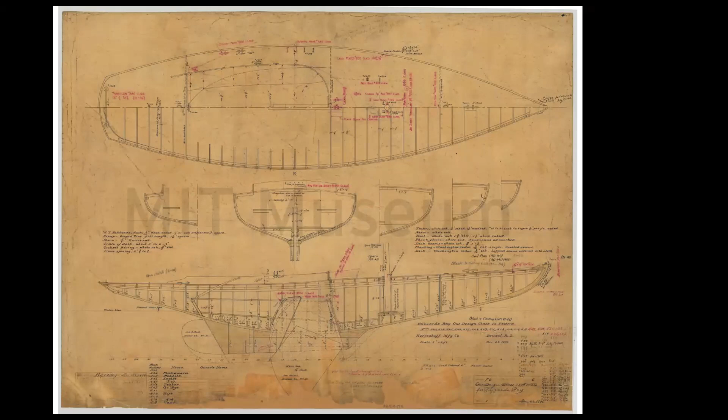So I kind of knew where to get the information - talk to MIT. The drawings are as beautiful as the boats quite often. So I persuaded Chappie that we've got the info. There's the original sail plan. Of course, I've shown you the Marconi, but we were stuck with that one, which I think is far cooler.

This is the Book of Offset. It's not for that particular design - this is another one. It would say 503, I think, on the offsets for the 15s. But talk to MIT - you might get the idea in this little talk that all roads lead to MIT. No, some roads lead elsewhere, and I'll talk about that.

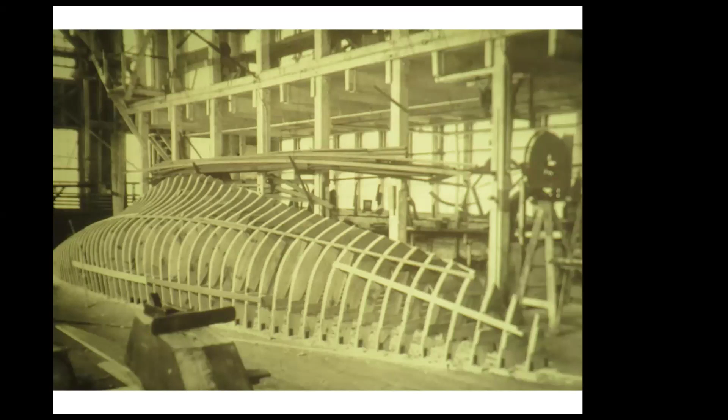So in the end, we pretty much use all these techniques, a mold for every frame, and build all this tooling to build one boat. We were smarter than that, and then off we go.

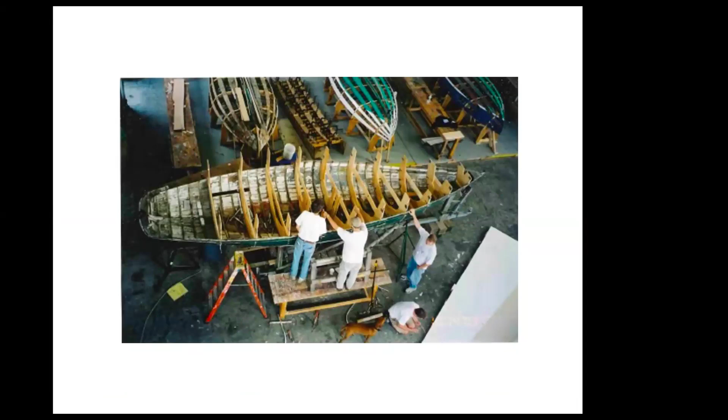We did sort of compromise on this boat. We did the mold for every frame, bent the frames around the molds, and squished the molds into the boat. And now you'll probably say, well, why would you ever want to do that?

Well, the idea is it's every other frame - you'll probably notice that. The idea is that you squash them and the boat's supposed to now resume its original shape. And of course, if you look at the tops of all those molds, they sort of don't seem very organized. So we set it on a platform, and once again, it's quite emphatic about the fact that that thing is totally screwed up. And that really all should be touching.

So that's why those guys are milling around in the back wondering what we're supposed to do now. Well, you push and shove some more. Basically, we stripped all the structure out of the thing, kept some planking in place - I think you're keeping the soul of the boat in there with those few planks. Somehow we've captured the idea of the boat, and on we go.

This is all old school stuff. We spile, take the bevels, back out the planking - all old school. It's as traditional as you can get. And blammo, see how fast we can plank?

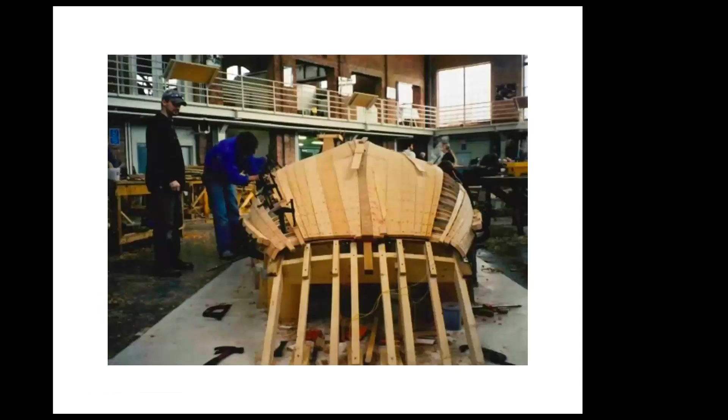These are IYRS students, and we have 3 boats, so I'm going to be moving. I hope you don't mind.

But anyway, there's Mark. He actually put in the shutter right before Christmas. He was in such a hurry that he drove the edges off the adjoining planks, and we had to redo the whole damn thing. But it was exciting anyway, and it was the quickest build we had at that point.

So there it is, all planked up, and now we've got that shape starting to emerge. I am a total sucker for boats in this stage - they're just a piece of sculpture. The coolest thing - they don't have to do a thing, just be beautiful.

Little interior structures starting to come together. This is sort of the idea behind this talk. So this is Fiddler at Mystic Seaport - it gives us an excuse. You can go to the museums, check it out, take pictures, record, and the students trundle along.

And I mean, it's great - it's such an excuse to do cool things. So there's Dave, Walter - they think this is cool. And actually, Dave is absolutely relieved that the coamings didn't break.

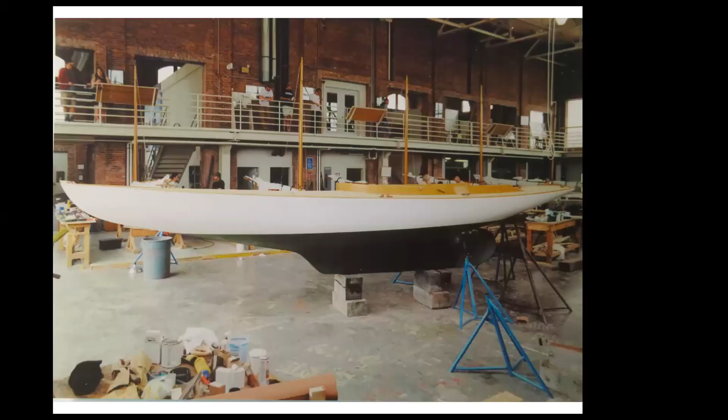So we have to fit those baubles, they call bow chocks. It's starting to look a lot better than that first picture. Matter of fact, it looks twice as long as it is. And the moment of truth.

So they're very cool boats. My father sailed them, he raced them in Marion Harbor, and he said it was the wettest boat ever. I don't know why people are so excited about them, but he did admit they went like crazy.

So there he is. Here's this young guy. After all, it didn't seem so bad. And what's coming is a sail, and that's the deal.

We have to have a carrot at the end, and that's launch day. Get it done, you go for a sail. You'll see there are exceptions, but still, that's the idea. You got 300 people looking at you if you don't get it done. How about if we get it done and go for a sail? And they seem to move when you offer them that.

So there they are, first sail. This was a good project. And there he is, see? Smiling. There's the future right there. The idea that he's 20 years older, I was old then, but he's 20 years older, it sort of blows my mind. He's like an adult or something.

Anyway, and the instructors get to go for a sail too. That's the big payoff for us. We get to sail this thing around. We don't know for a couple of days, and sometimes we teach sailing in it, and that's I think the Wheeler Estate in Jamestown, Rhode Island.

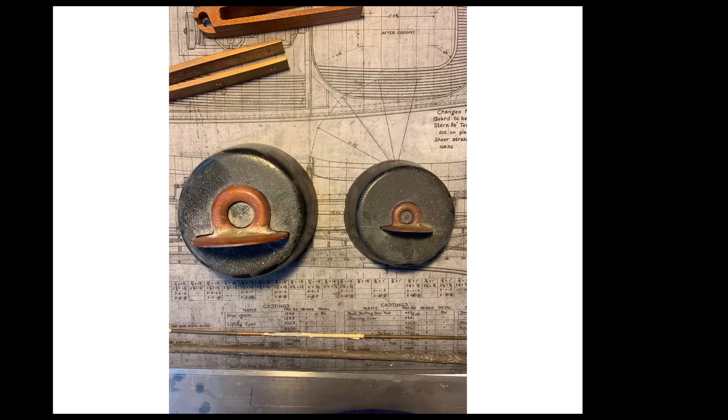And we do go from museum to museum. Then they've got all the stuff. You, the world, have this.

There's a guy named Claas van der Linde. He's Swiss, precise, super nice, crazy knowledgeable. He built a website for you to pursue everything Herreshoff right in the comfort of your own home. That's the title of it. You can find it at herreshoff.info. Try that first. Watch out for my facts.

Anyway, Claas built this thing. He went to the Herreshoff Museum, took each model down, read what Nat or whomever wrote on the back of it, and documented it all. Then he built this website where you punch in a number, like 503, and all of a sudden you have everything to do with a particular design.

And here you are, you guys are here. I'm talking about computer stuff. It's not really me, but man, is this stuff useful.

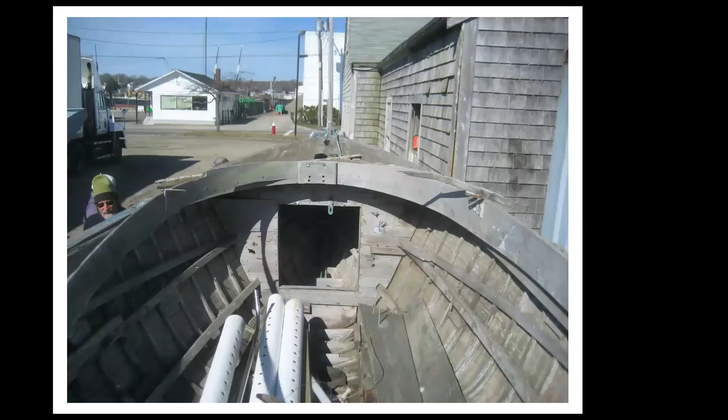And it had a lot of detail in that light framework of the Herreshoff boats, the coamings. And I admit, I was kind of trying to push my own deal and get to do it. But there were a lot of elements that just kept reminding me of the Herreshoff launches.

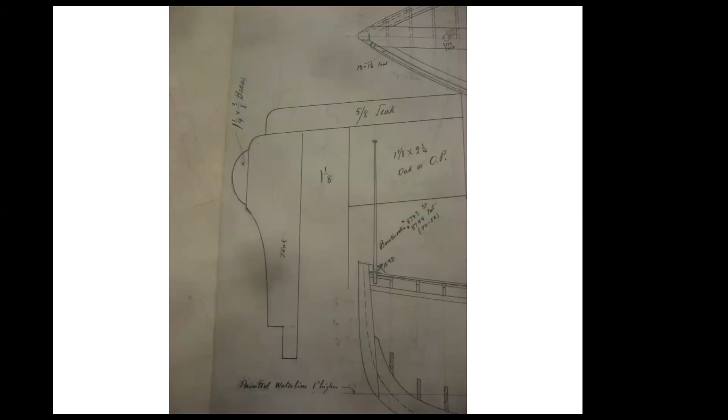And then there's this beautiful, see, it's double planked. It was a beautiful build. And then the molded sheer strake, which I think I might have, yeah, see the swell at the top. Well, this is a Herreshoff drawing of that very detail. How could you go wrong? It has to be a Herreshoff. And so I fell for it.

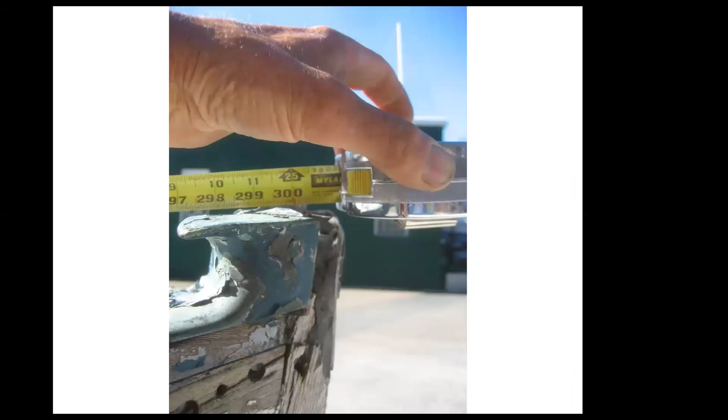So guess what, we decided we'd do this thing. Those straps, as soon as you remove them, pieces fell off just trying to get it to that. So I had some empirical data, and I went to see Kurt, and we pulled out a billion drawings of Herreshoff launches. And he started to shake his head very early.

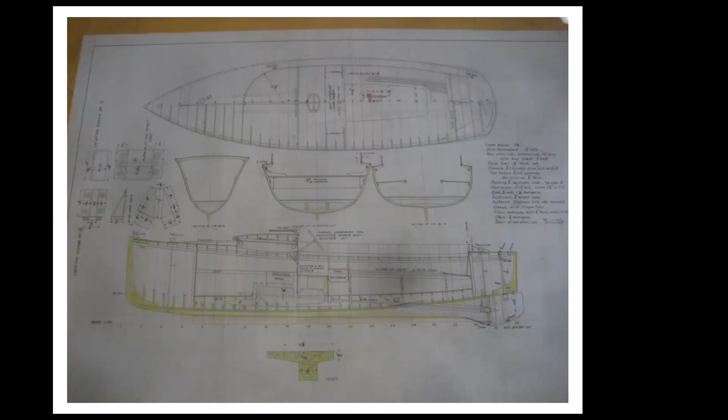And I'd have to say I'm sort of smitten with the drawing, so I get going, and I thought, oh Kurt, this is cool. I wonder, some way we're going to find that launch, because I know it's in here. And I said, maybe it's that one, look, it's got the double cockpits, it's got to be something along that line. And maybe it's a secret one.

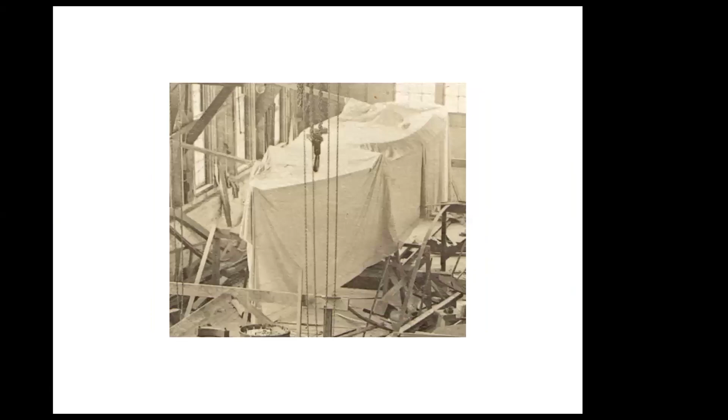He was sure, Kurt, by this point, said, listen, there's no silver bullet, you're not going to find that. And I said, what about all those little notes they write all over those drawings? I'm sure somebody put one that said it's just about as long as a 25-foot tape. I'm sure it'll be right there in red or black or blue. Maybe it's Bubble, the family launch.

And this is the one I actually really wanted to build, so I tried to persuade everybody. Well, Vicky and Benson put Bubbles' sheer and half breadth on the floor, looked at me and said, this is not your boat, you're done here.

Yeah, I'm sorry. So, which brings up another point. If you want the key to, not the city, but key to Claas's thing or anything to do with Herreshoff, try to find a boat with one of these plates on it. It immediately tells you its whole pedigree, who owned it, why it's important, what year, everything about it, absolutely everything. You have that number and go to the Claas's site.

They're so important that I feel this is what you should do to them: just bolt them right through the stern of the boat. Nobody will mind, I'm sure. I said this once at the Herreshoff Museum, and in the back there were people fainting, they're so sensitive.

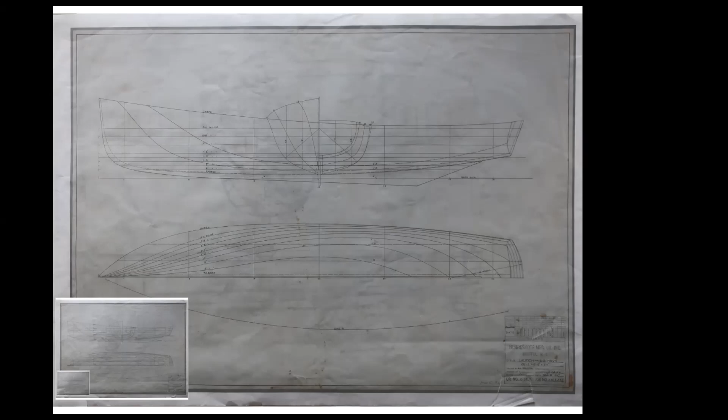And they drew one, well actually I think Evelyn said more than once, they drew the set of lines for the 330 launches. And guess what, we decided that's pretty cool. That's Resolute, a 330 launch, at Mystic Seaport.

How about if we take that hull, scale those lines, build that hull, and put the stuff from the old boat in it? Nobody says no, because nobody dares.

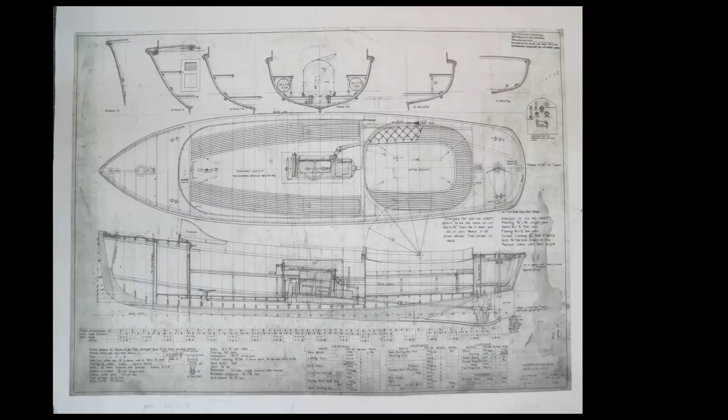Anyway, we thought, okay, here's the construction drawing, but why not document everything in the original and stick it in that hull? I'm not a naval architect, I needed a proven hull.

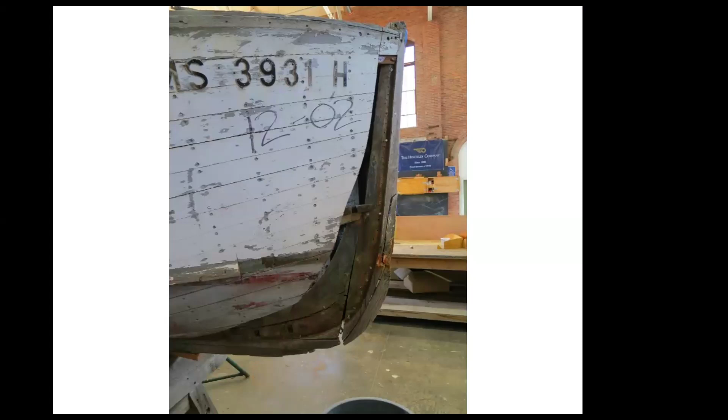We kind of liked the Herreshoff thing, so we did steal a bunch of elements from it. It had a sharper forefoot and an almost plumb stem. We snuck that guy right in on our lofting.

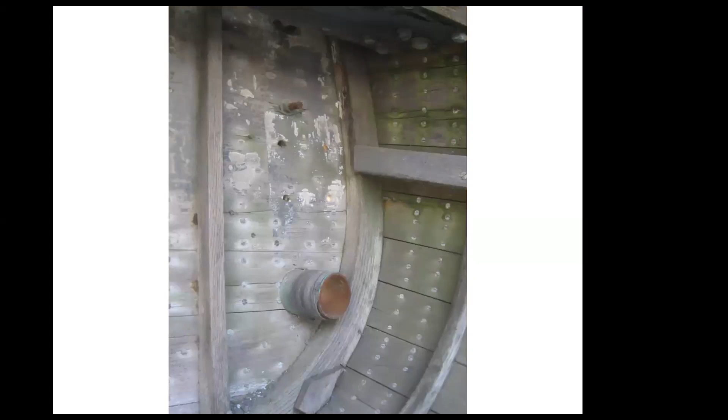Max is very excited about it. And the stern was built with steam-bent frames around it, which is a little bit different than Herreshoff, but we faired it right in.

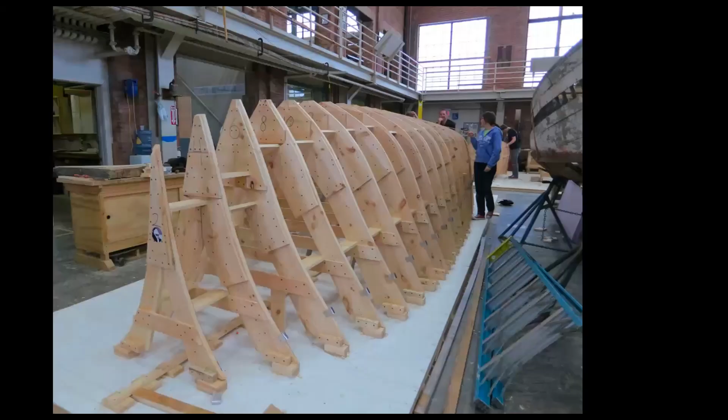And so we lofted a 330 and set up all the molds just like we were supposed to, but we slid in elements from the original boat. Those full-length longitudinals, you don't find those in Herreshoffs. But we thought, we got this boat, we'll make it a hybrid.

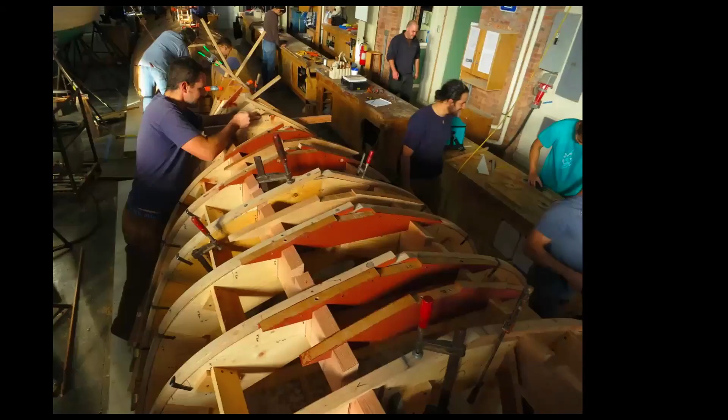Anyway, I had a really good gang. Steve Lublitz, he runs Wooden Boat Works on Long Island now. This gang, they were motivated. And Sam, where is Sam now? He's 6'5", that's short Sam. There was tall Sam, he was 6'6". We worked together, anyway, he's a really cool guy.

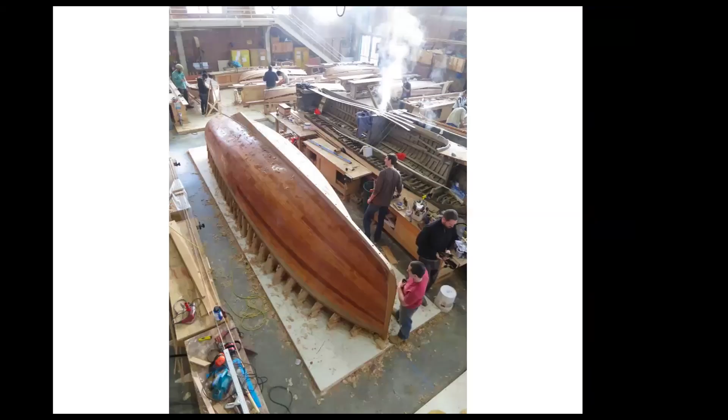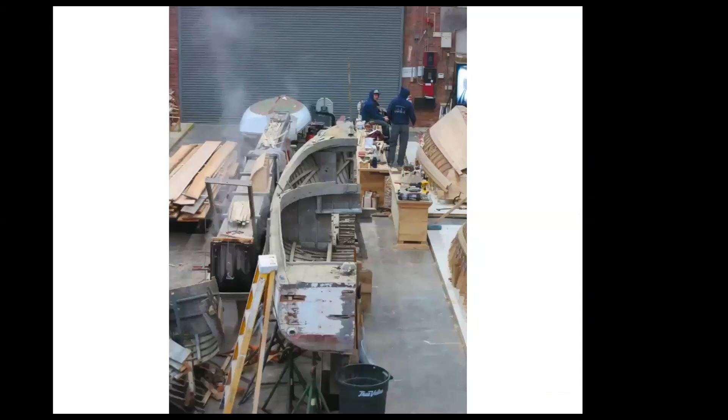So, double planking, the off shear strake, it's a quick build. These guys are fast, look at them go. Anyway, over she goes. Like in the small boat shop at IYRS, we do everything like they did it because we think it's cool. And now that is a teaching instrument.

I never got to cut a boat in half, full length, ever before. It is the coolest thing.

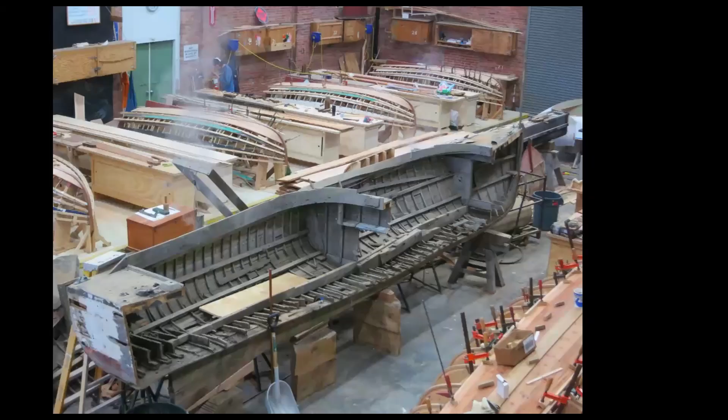So all that info is about to go into this boat. And I don't know, I really wanted to keep it, I wanted to stick it to the wall of the shop. They never listened to me, but that was a gas.

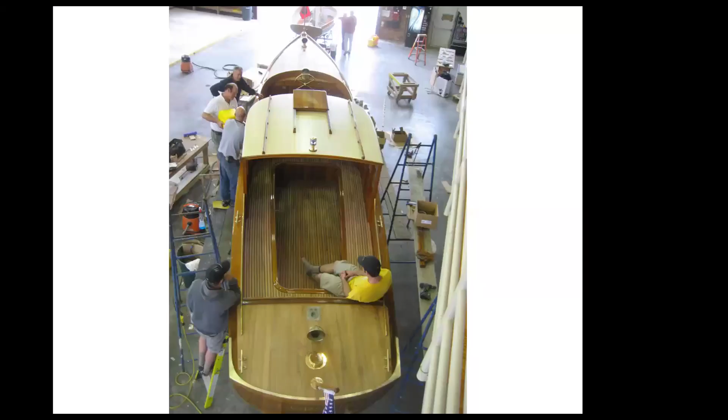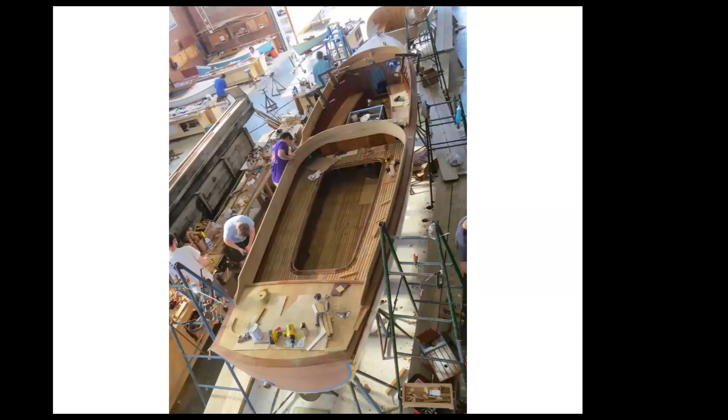So we did it. We stole some more detailing from Corsair notes, and here we are putting it together a la IYRS, and it was a fabulous build.

It's all the frame spacing, all this stuff that was longitudinal, all the stuff came out of the old one. But we really just went with a proven hull.

However, it was nice looking enough for some guy, Doug Broadwater, to buy it and take it to his Adirondack Lodge. And it sort of just tools around the lakes up there. I have to say that's better than a dumpster.

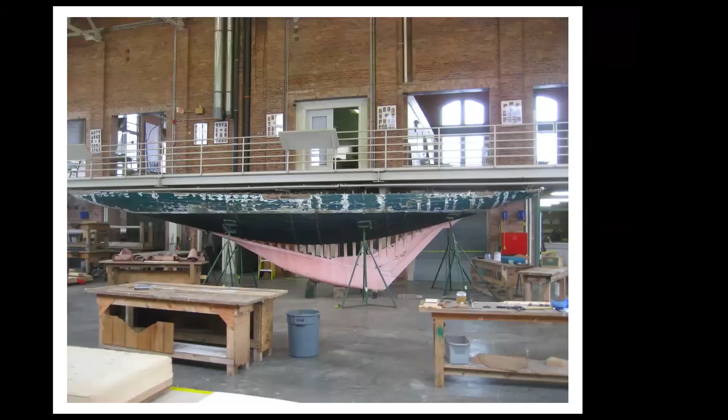Finally, we're getting there - don't fall asleep yet. So as I said, the parking lot's filled with all these boats, and some of them just speak for themselves.

This is Ruida - Ruida 5, that's all I knew about it, that was in the little blurb from when it was donated. And Elizabeth Meyer - all the boats at one point were painted with house paint. She just thought they should look a little bit better. And it was just striking in itself.

They started to have interest in restoring it in about 2006, I think, but it was slightly delayed, to say the least. But that shape, I got all excited about it, and I thought I was excited and terrified, to tell you the truth. This thing was big from my point of view, not around this place, but from my point of view.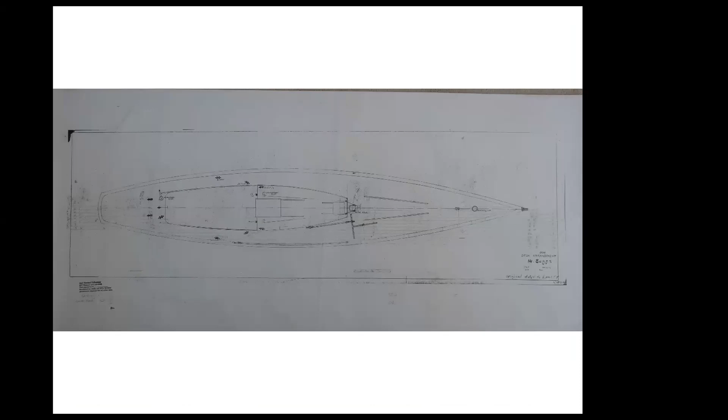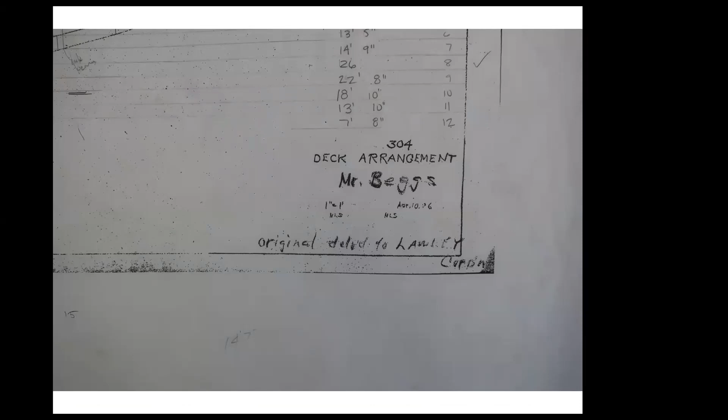Oh, he had a blueprint. So now I'm thinking I've got it, no sweat - there's the blueprint. It did really come out badly, but the key part of the blueprint is this: the boat was commissioned by Mr. Beggs, so we've got the owner's name, and it was built by Lawley, the builder. So that's a lot, but we still don't know enough to build a boat.

However, and I have to admit, I don't know how this happened.

There was a... well, you're going to find out, but I don't know how I ended up in the IYRS library. I might have been asleep in the stacks or something, but it turns out these are scrapbooks, and they're all yachting clippings collected by a guy named Leonard Fowle. He made scrapbooks like crazy.

This is about a week ago. Our new librarian, Francis Frost, who is a wizard, said, well, you've already got your little sticky notes in there, why don't we find out about these guys? So I actually asked them to, and so there they are.

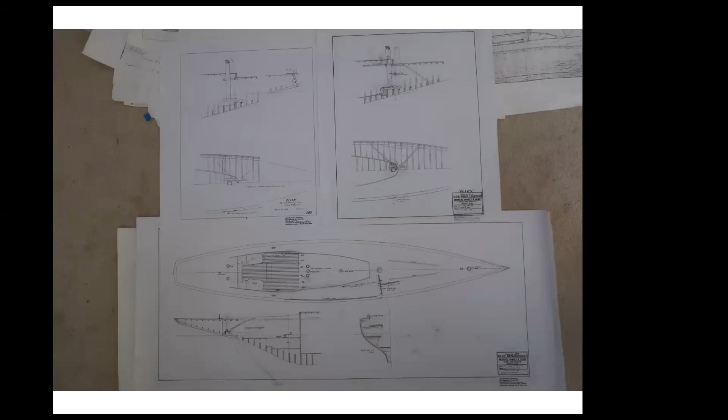And when you get to that point, all of a sudden mentioning Ellen, and you have a million drawings of an R boat that's just like the one you've got - blammo, now you can do the job. And so it had everything.

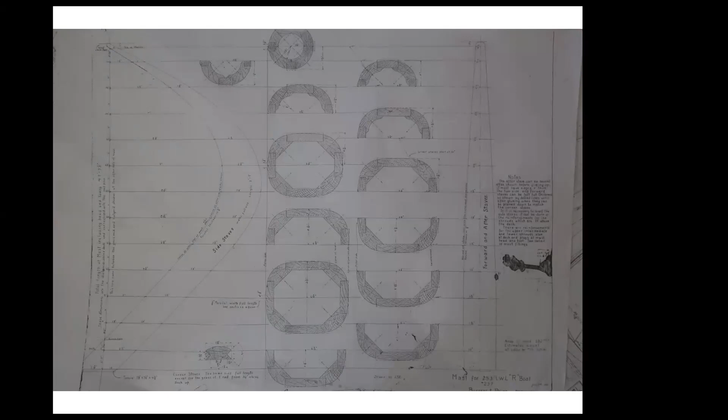And see how it says Dandelion? Well, they're all the same. There's Ellen's little alteration. Ours look like that. We'll go with that. We're going to take the information and fly. 'Mast, you sure it was for Dandelion?' 'Sure, it's the same as our boat.' We decided - actually, I measured a whole bunch of stuff. It had to be. But we had now the key to that city, and off we went.

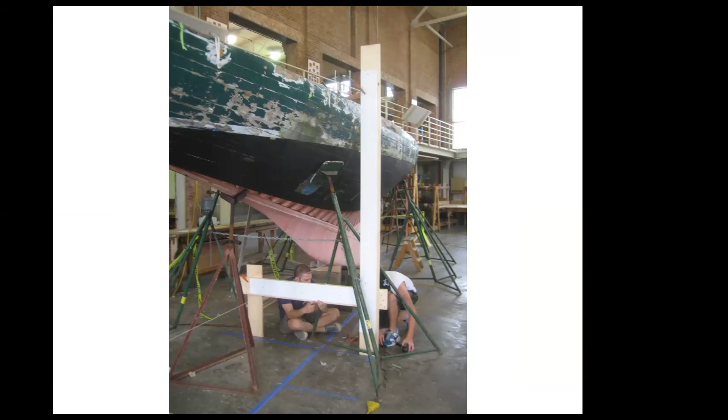So the boats - you're going to notice the boat doesn't move much, hardly at all. And they decided we'd take the lines off. We didn't have the offsets.

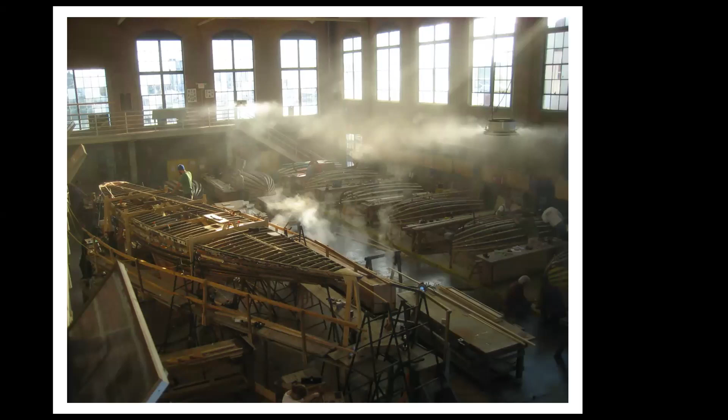And there's Andy Chapman saying, 'Warren, you have about 50 slides to go through, keep moving.' But we are reading the boat so that we could draw it on the floor, come up with mold stations, and start tweaking, pushing, shoving this hull. We didn't make molds, we actually pushed and shoved.

And see, we poked the bow up, the stern's all pulled up. We've got what we think is a nice sheer line, all that stuff. We just racked the boat and pushed it from the inside. And we had readings from our lofting, but we didn't put molds in. 'Is that all right, Harold?' 'Okay, good.' And anyway, there it is.

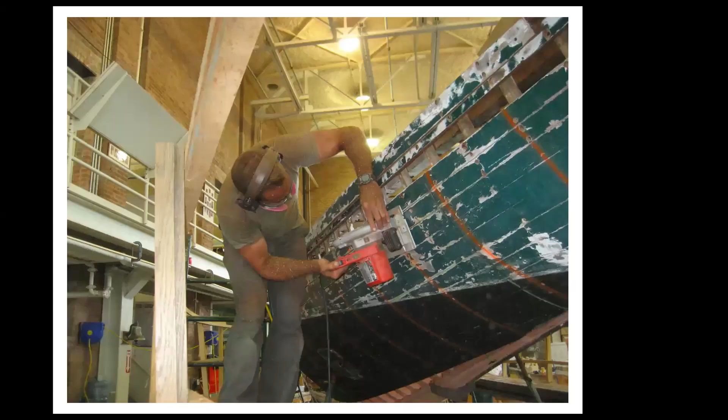Sort of - it's on poppets. It's been tweaked somewhat. And then we very carefully and gently took it apart. And these all have electric cords, Harold, so these are all right.

And now came... that's Dave. I work with Dave now.

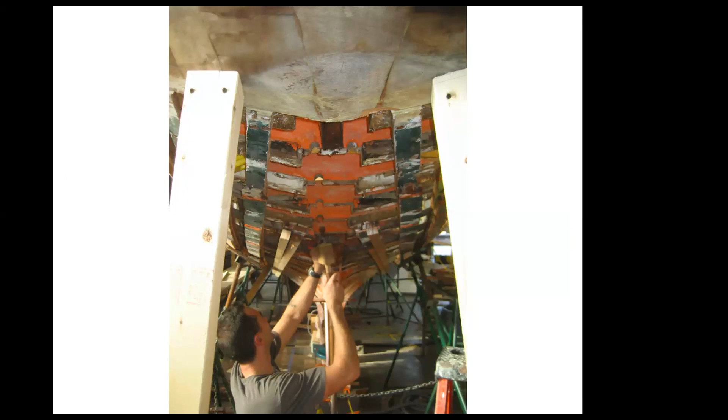This crew competed to see how dirty they could get, not changing their clothes, and how many hours they could put in. They were wired, and knew from the get-go this was a big project.

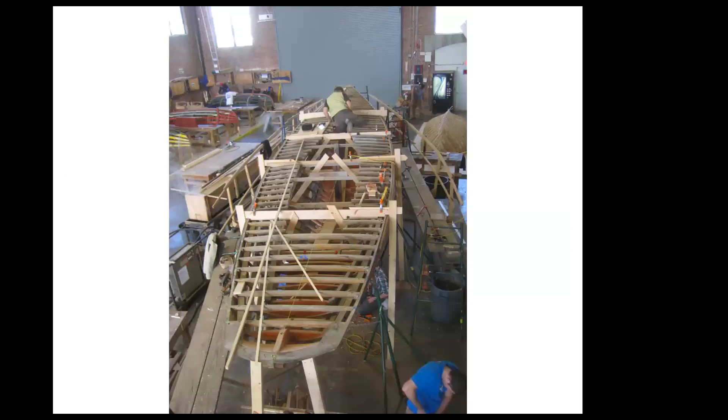We're going for it, so more pushing and shoving. We believe what we did is we took the planking - it's a double planked hull. We took the plank off and fastened it to the preceding plank so it made a ribband, so we could steam new ribs inside the boat. It's become quite flexible.

Now it's set up, and we started to replace some of the smaller pieces. They're very proud of their work - that's Bryce on the right, and Andy. Kiss me, I'm a leprechaun or something.

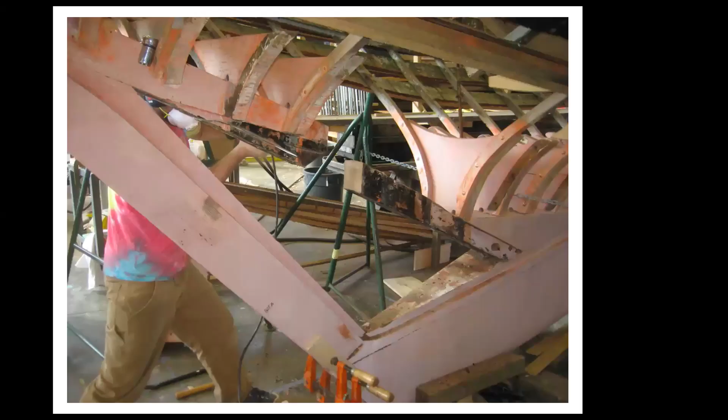I don't know what it says. Anyway, I know it looks daunting. Is that a stern feather? I've heard that term - it's so small, it doesn't seem that way.

Anyway, so then every other frame is replaced, so everything is to keep the shape you've generated. See that strut just picks up that ribband. There's some fine tuning, and that's a lot better than it looked before.

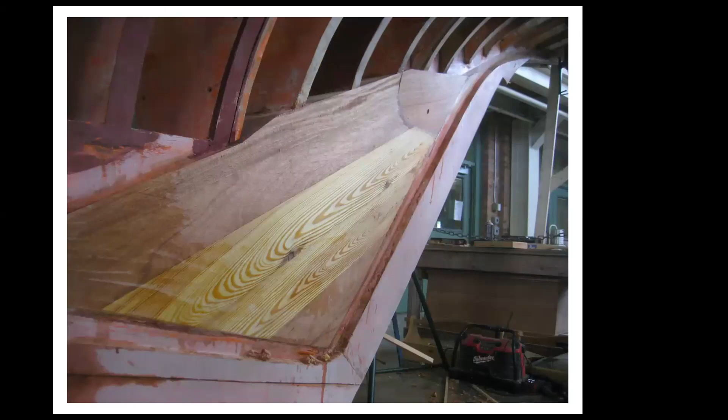So, all framed out - we're just going to blast through this. We started the planking, as I say, double plank mahogany with a cedar inside liner, all back fastened. I'm sorry to say it was all done with 5200 between it.

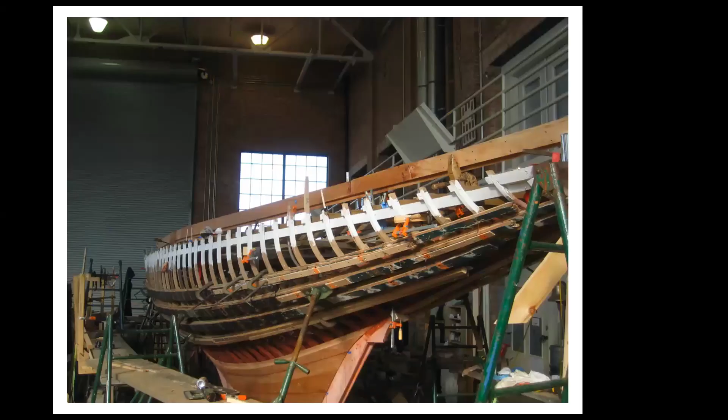Everybody uses GoPros, all that stuff. Well, I'm too old, and this is what we got.

So down we go, and that's the liner going in, and that's Toby. It's coming along. They use this tongue depressor type of spiling. I think it wastes battens and tongue depressors, so we don't use that anymore. It's a Long Island thing, I've heard.

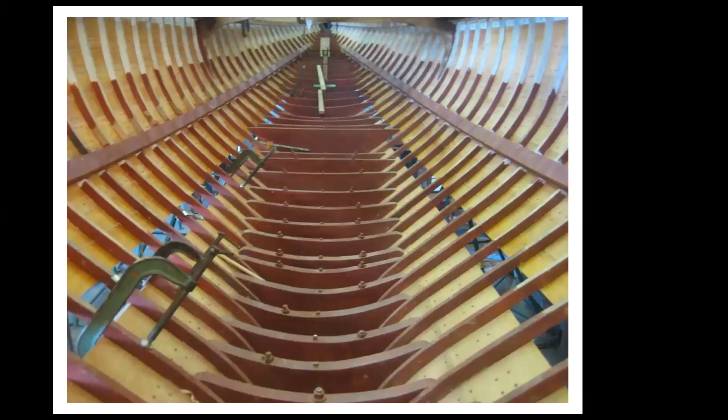And there, the last plank going in - those two wedges are so we could keep the liner in. I have to say that right at this point, I disappeared from the project for a month, so you don't actually see this plank go in. I'm sorry, but it sure looked cool at this point inside.

These floors came with the boat. Somebody had started - they took a month to fair out. They're wretched, poor Toby.

And just to guarantee they actually did it, there it is, all planked up, and it'll be pretty nice. It's funny, this angle looks awful in the stern.

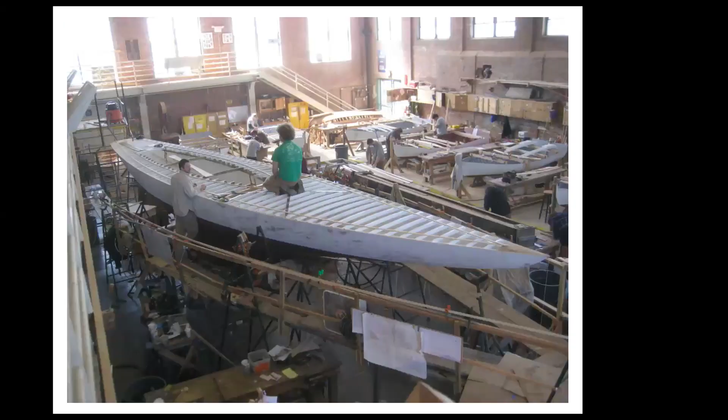Deck structure - I could stand right here. I think I discovered why I could stand here. And so we have a sequence - when you have 8 people on one boat, there's a scramble, and the boat's only, I don't know why, it's not very wide. So covering boards, we started the planking, deck planking.

Here it is, it's just shiplapped, zillion fastenings, with Doug, Andy, Bryce, Toby, Brian. I don't know who this guy is. Oh, that's the other crew - they're working on a 12 now.

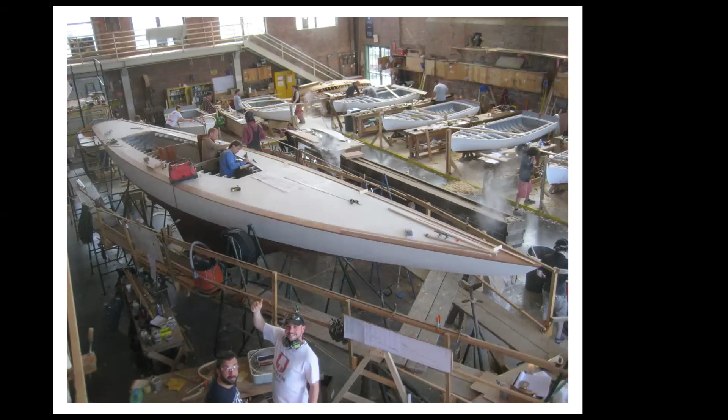Anyway, what I found about this gang is there were leaders, but they couldn't lead too much because I get nervous and threatened, and they would just motor - and that was good because there's a ton to do.

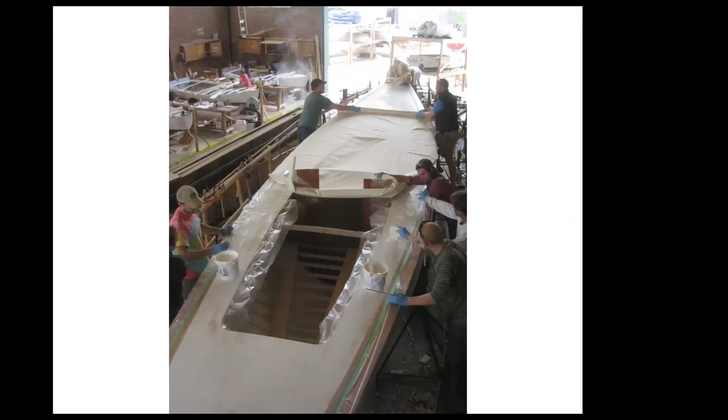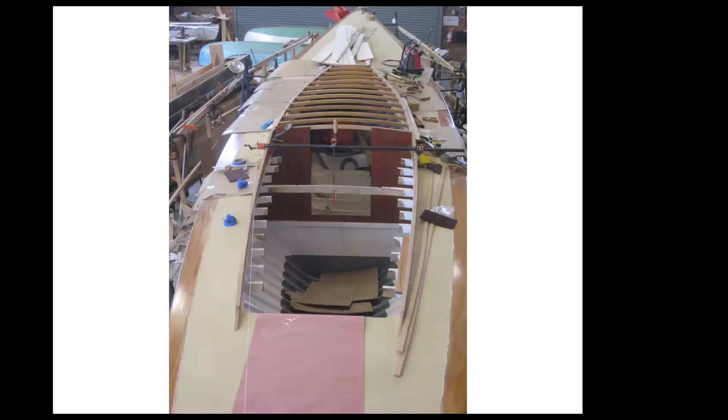So we've got it decked. Now we're canvassing the deck. Now we need some accommodations in case people want to go cruising with small children. And the housetop framing - so it's starting to come together.

And it was a cool arrangement with the toe rail in that it captured the edge of the canvas, but the covering boards were bright outboard, nice looking. And then that little metal band covered the edge of the canvas forward.

I stole that idea from the 6 meter they did at Newport. In this business, it always seems to me a good idea to steal whatever you can. So Andy made that, very proud of himself - sort of bizarre, but we saw it in that photograph, the 1929 photograph, we think.

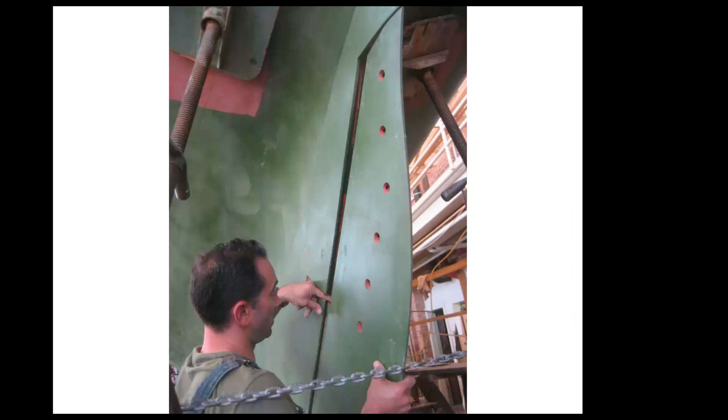Now you've got this elaborate stern, where the toe rail just fairs right in, around it goes - Andy did that. It's a long, skinny boat, and everybody piles up in the cockpit every time. Dave was in charge of the things that actually count - you want to steer. Tim Conway came in to put the name on.

Rowena was one of the few boats I've ever encountered that actually looked as big outside as inside. Usually when a boat goes in the water, it's this tiny little thing, very sad - I built a 30-foot powerboat, my shop was immense, we build huge things, but it was huge and then shrank. But this one seemed to retain its length the whole time, and the shape, and be totally cool.

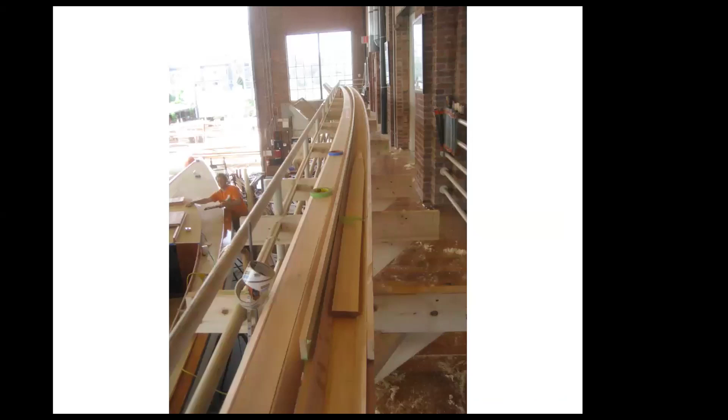Yes, there was this miracle happening on the mezzanine. Why couldn't I take the picture down to the boat like that? Because Felix, who was a student - he's German, a wizard - had to leave for a while. He came back to make up the time so he could get the certificate and initiated the building of the mast, with nice German precision and execution.

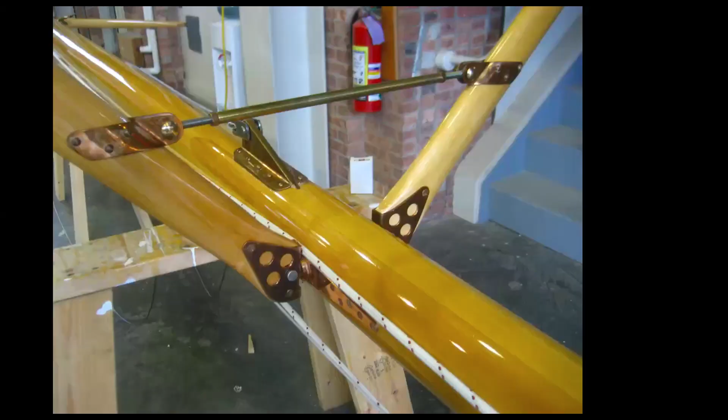And so the crew would drift up and help them glue, back and forth. The thing was a construct in itself - I mean the metal, and we actually got professionals. I scaled that photograph of the 1929 mast, then used the drawings and came up with a spreader location. That's totally taboo, but then we got it all engineered by a pro, and it still broke the spreaders, but it looked pretty cool.

There's something about this boat - everything's too long, too skinny, but very, very cool. For Jen, I work for Jen, she's all right, she's alive, but all that rigging and the mast and all that stuff - one day she just fell asleep on the companionway cover. So I didn't think you guys would want to go through all that, the making of the mast, because I didn't want you guys to sleep on whatever artifacts are around here. But it looked good, no matter what angle you looked at it.

About 20 minutes later, the second spreader up broke, and I learned a lot about geometry that day. Anyway, scale.

I told you that coming to Essex, it's a way to build real boats, big boats. The whole idea of a whole town building a boat and everybody turning out blew my mind. So I was kind of nervous. I thought about scale a lot on the home front, and I put AD in a white jacket because I figured he was like management or something, and I think all the story ghosts would kill me for that one.

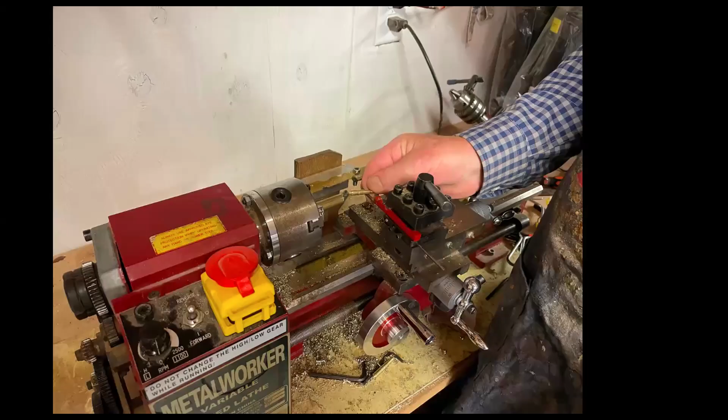And then there's real small scale - these people that blow my mind, and this happens to be my brother-in-law's basement. When you can make a companionway ladder like that, with fingers like that, it just amazes me. There's a real reason I'm showing this to you - that cannon, when you drill a touch hole, it will work.

Not bad. So Henry was an orthopedic surgeon. He had an accident, he compromised the vision in one eye, he had no depth perception. Well, it's hard when you're a surgeon - where am I headed here? And so he built models to regain his depth perception.

And so who cares how small this stuff is? Everything is on its way to the next thing. It never diminishes the result. It seems to me scale...

And the idea that - what's his name - Roger Hambidge, at Mystic, he's a shipwright, and then he makes exquisite models. But now they've got him sighting the sheer line on the dummy, and he's telling them when it's right. So it's all this training of the eye, and scale seems to not have a lot to do with it.

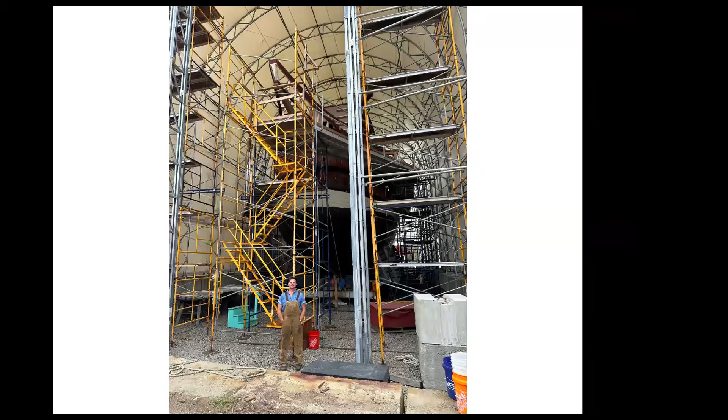So you have a young guy like Tom who can really see and has super concentration. And you need a nice pattern for that Herreshoff rudder fixture there. He just has the focus, the talent, the determination. And yet what's he doing? He's putting new chain plates on the Susan Constant, right?

The Mystic Seaport. And so scale, whatever scale - I can do scale.

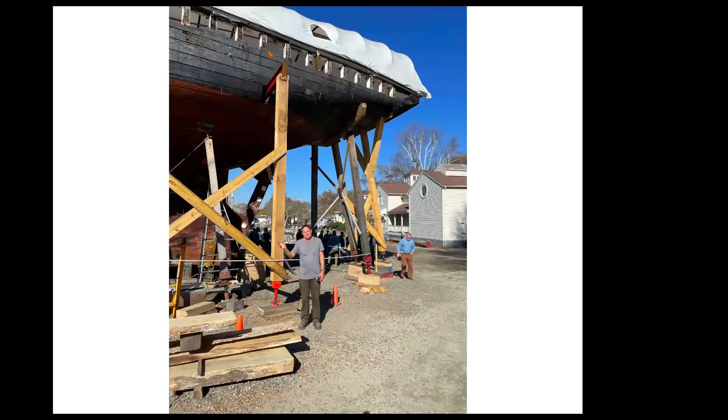And there's Sam, yes, he's in the bow. This was a surf boat, a rescue boat from the Humane Society. We did a replica, and there's Sam working away in the bow. Yet he has the job, with others obviously, of rebuilding the stern of the Dunton. So small to big - I know I'm hammering this thing to death, but it just seems these skills can be any size, and they switch back and forth.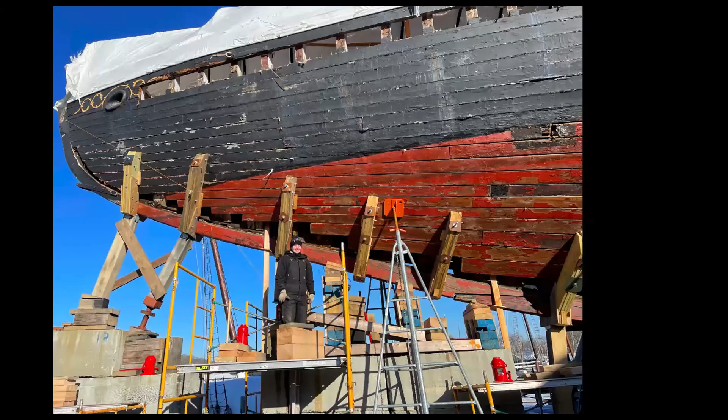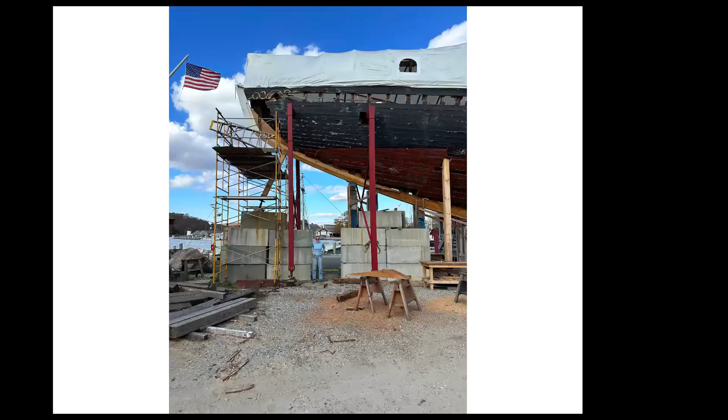So something works as you go between all these applications of the discipline.

The idea that they put the whole town in these schooners, basically, and the picnic baskets - well, Ansel mentioned or described it, when the whole town turned out when they launched these boats and people could get on them and go to Gloucester, under tow. We can only get 17 in a boat with 3 life jackets, but it's the same idea - everybody gets in, goes for a ride. So I think all these things celebrate the abilities, the talent, the techniques, the methodology, all these traditional things that we try to keep going.

And if you have someone pointing you at the future, then maybe we'll just keep those techniques and methodologies going. And that's all I know. Is that enough?